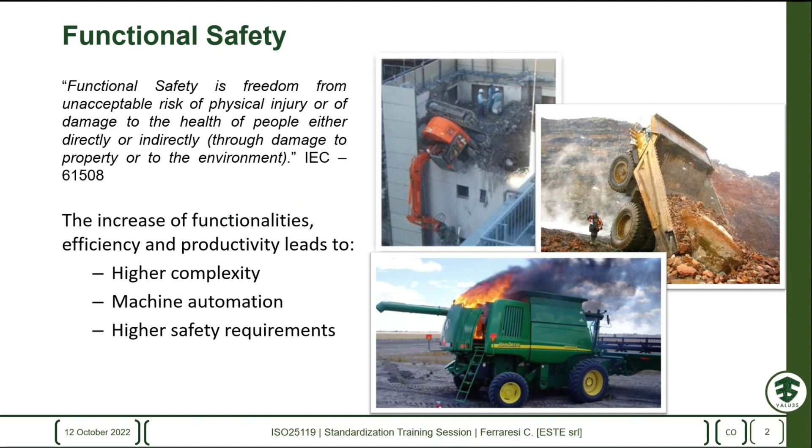But as I said before, those standards are too general for the application, or it may be too difficult to apply those standards, and therefore a set of specific standards have been developed for each industry compartment.

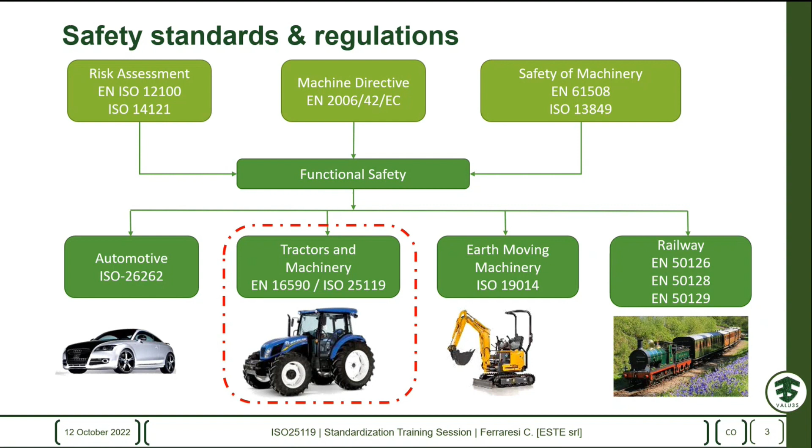The ISO 25119 is applicable only to the safety-related parts of the electrical, electronic, and programmable electronic system. So it covers all the electric and electronic parts of the machinery, and not the mechanical part. It's related to the safety of the electronics.

And it doesn't cover all the other hazards, there are specific standards for other hazards, for example, for electric shock, for fire, for ergonomics, or corrosion, electromagnetic compatibility, and so on. But that's not the context of this standard.

There are specific standards about those hazards. And the use of ISO 25119 is voluntary, so the manufacturer can use other standards.

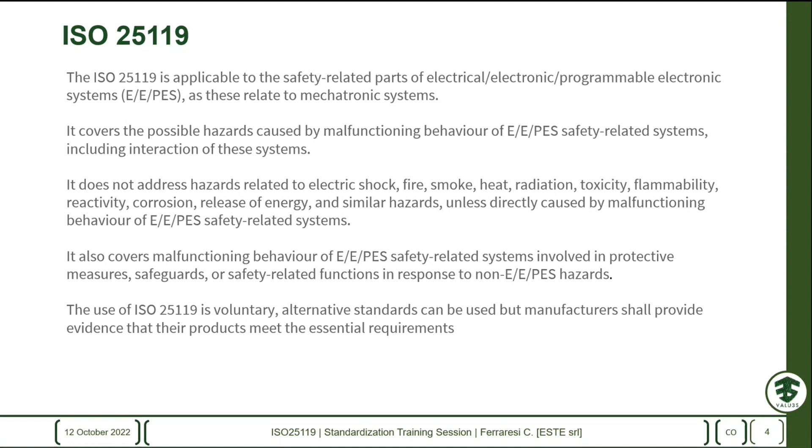I showed before the more high-level, more general standards about safety. Manufacturers can use other standards, but they have to provide evidence that the approach they have used meets the essential requirements that are also reported in this ISO.

The standard is divided into 4 parts. We have part 1 that introduces the general principles, the normative references, terms, definitions, and some other generic introduction about the

ISO 25119. There is part 2, which defines the concept phase, so all the methodologies, requirements, and work products that have to be provided during the concept phase of the development of the machine.

There is part 3, that describes the requirements about hardware, software, and system design.

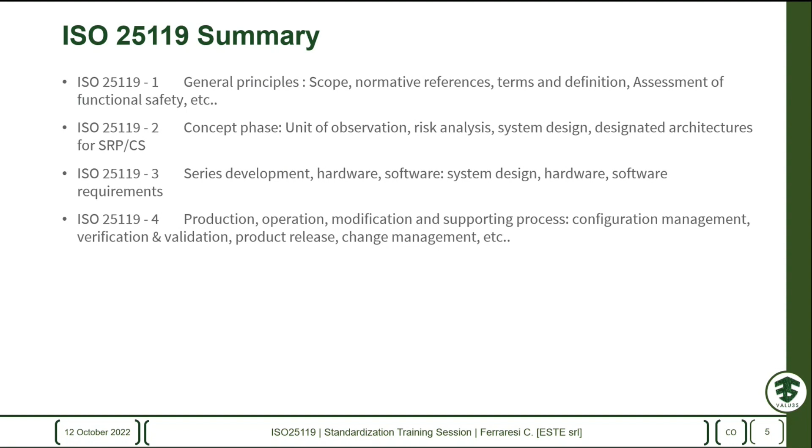And the last part, part 4, regards the production, operation, modification, and dismissing of the system. So the standard covers the whole life of the machinery, from the design, from the concept phase, to the development, and to the production and dismissing of the system.

So it defines a safety life cycle, and this safety life cycle is a derivative of the widely used V model that is common in many other standards.

So the development process must follow the V model, where for each design activity there is a parallel verification or validation activity that has to be performed in order to go on with the process.

So, as I said before, the standard defines all the requirements from the cradle to the grave life of the product system.

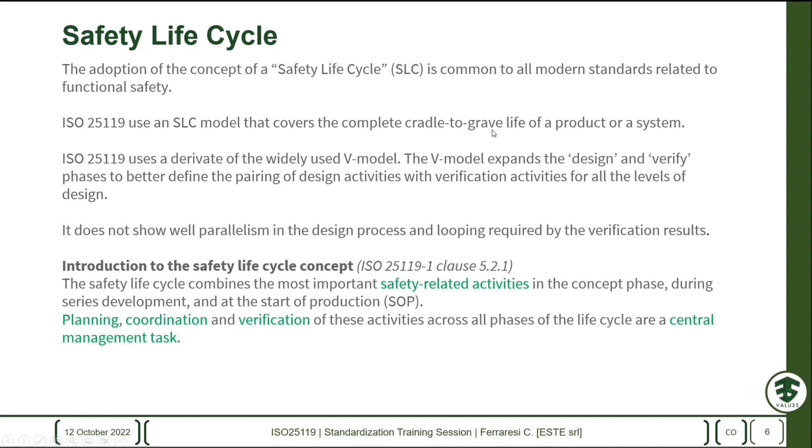Here there is a diagram that shows more or less what I said before, the different parts of the process. On the top, there is the concept phase, where we have some tasks that have to be performed.

On the center, there is the series development, so the system design, hardware, software, product release, and other things that have to be done during the development.

And on the bottom, there is the management of the production, the maintenance, servicing, repair, and the decommissioning, or the change management for modification.

We can see that on the left there is the management and assessment of functional safety that must cover all parts of the life of our system.

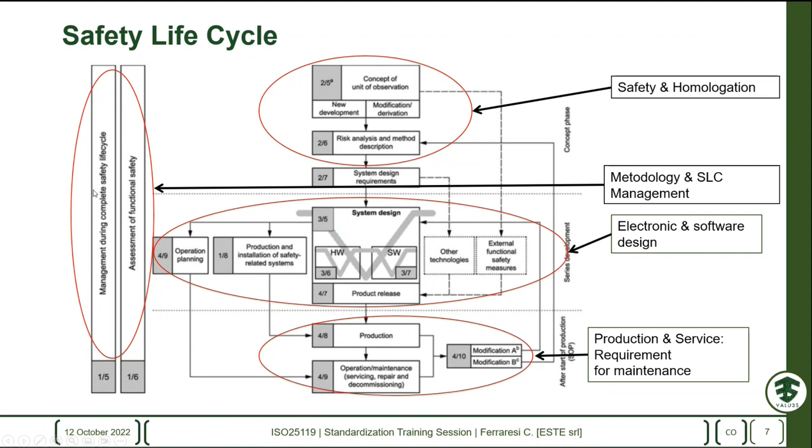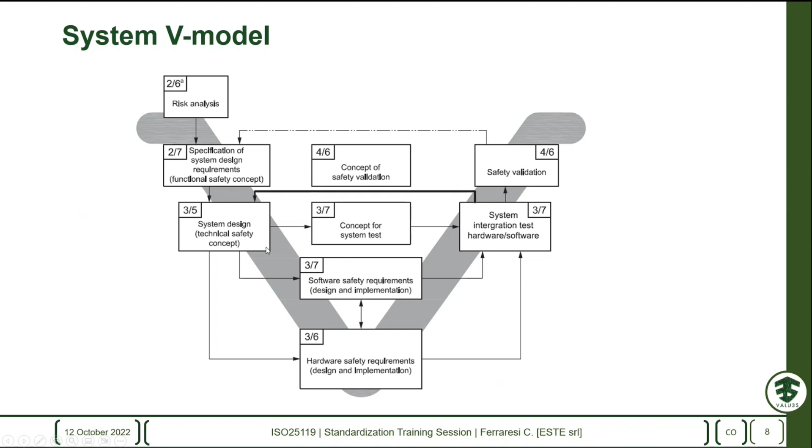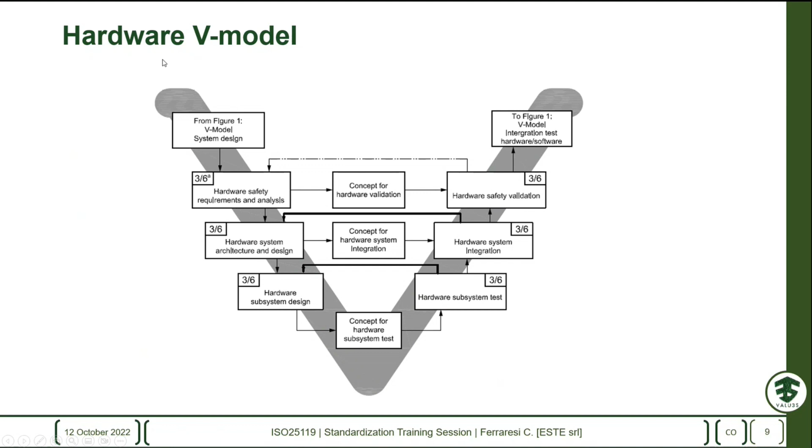As I said in the previous slide, the V model relates to system design. Here is the V model for the hardware design. The standard gives the manufacturer a detailed series of activities, work products, and verification and validation activities that have to be performed in order to validate and ensure the safety of the product. So we have the activities for the hardware and for the software - it's not only a general V model, but a V model declined for system design, software, and hardware design. So I can say it's quite detailed.

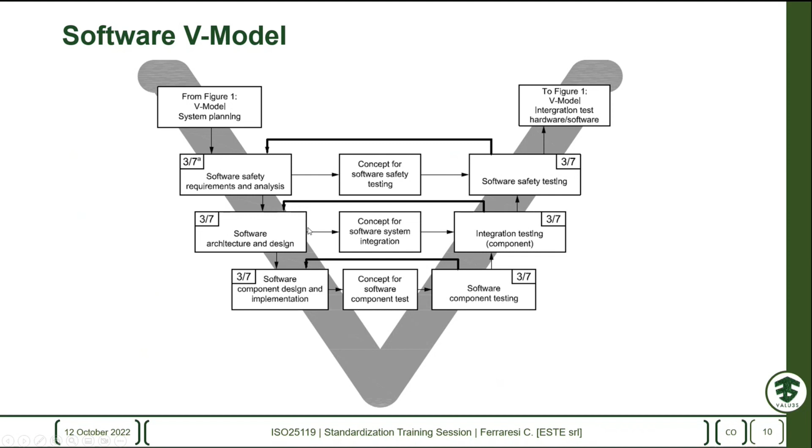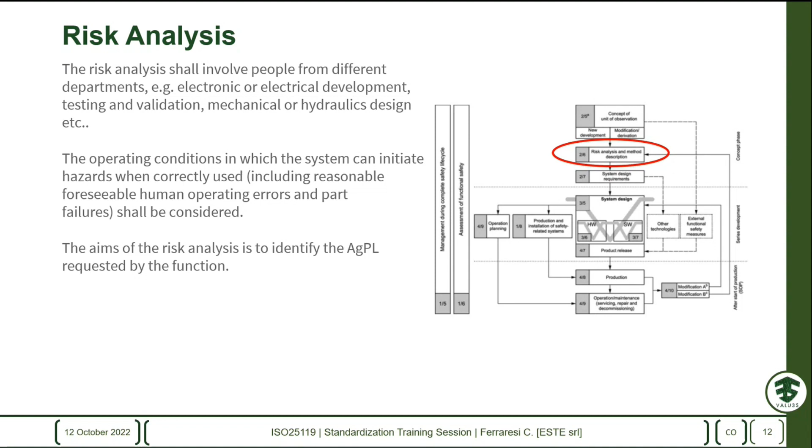One of the most important parts of the safety life cycle is the risk analysis, the risk assessment. This phase aims to identify the hazardous situations that can be generated by a malfunctioning of the safety function, and usually involves people from different departments - electronic, electrical, testing and validation, and so on - in order to analyze and identify all the hazardous situations that can be generated by our system.

So the risk analysis is based on three factors especially. The first one is the severity. When we analyze the hazard, the risk, we must consider the severity - what is the harm that can be generated by the failure of the system?

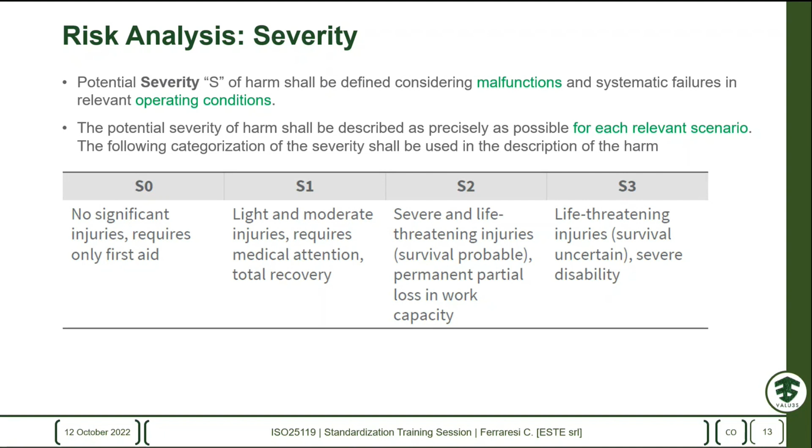The severity shall be considered for each relevant scenario - on the road, on the field, in the garage, in confined areas, and so on - any relevant scenario that the manufacturer defines. So we start from S0, the lowest severity, to S3, which is life-threatening injuries and the death of the operator, of bystanders, or others.

Another factor we must consider in our risk analysis is the exposure - the frequency, the probability of how much our system is used. The exposure is how often and how long the operator, bystander, and other people are exposed to the hazard, where a failure could result in an injury to the operator or bystander. So we must consider the severity, the exposure,

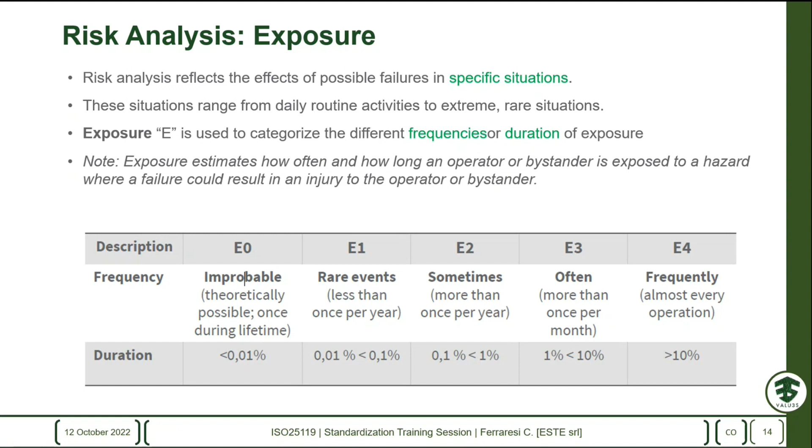and the last one is the controllability - the capability for the operator to control the dangerous situation and avoid it. So we can have a system or failure that is easily controllable, giving this hazard a rate of C0. But we can also have a hazard that is unavoidable, and so we give it the C3 value, because there is no way to avoid the hazard in case of fault.

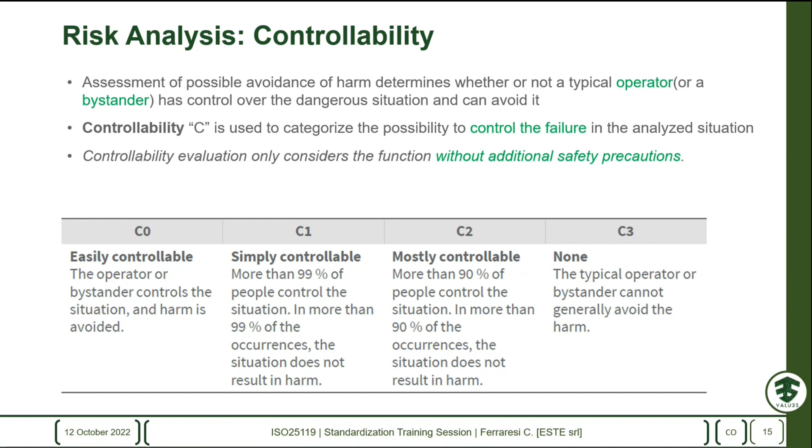Once we have all three estimations - severity, exposure, and controllability - for each scenario, we can determine the Agricultural Performance Level, the AgPL, required by the function. AgPL is one of the most important terms in the standard, and is the probability of the risk. It gives a value to our system on a scale from level A to level E, and on the basis of the AgPL, we have more demanding or less demanding system safety requirements that have to be fulfilled in order to ensure the safety of our system.

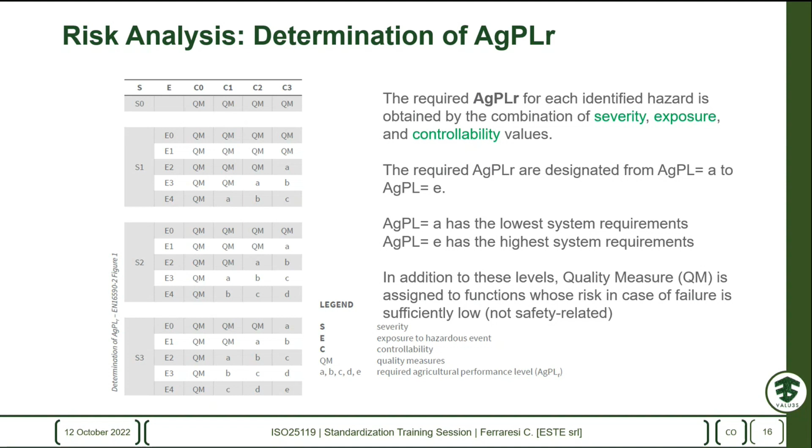So we can say that on the left there is a diagram showing, on the basis of severity, exposure, and controllability, the resulting value for the AgPL. So we performed the risk analysis and obtained the value of the Agricultural Performance Level, and this level is a probability of failure.

It's the residual probability of a dangerous failure, and we can say that it can be compared to the performance level defined on the safety integrity level, the SIL, that maybe some of you may know, like the ASIL level. There is an equivalence between the performance level defined by the 25119 and the performance level of safety integrity level defined in other standards.

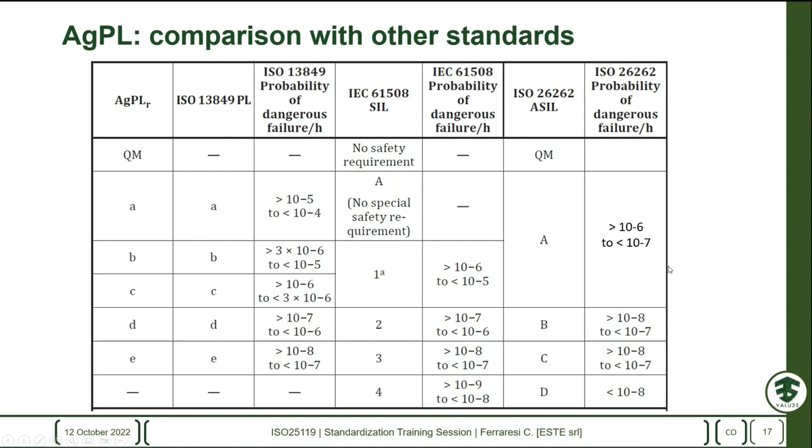The common ground is the probability of dangerous failure per hour. Different standards call the performance level in different ways, but the important thing is the probability of dangerous failures, which is the same for different standards. So there is a comparison table.

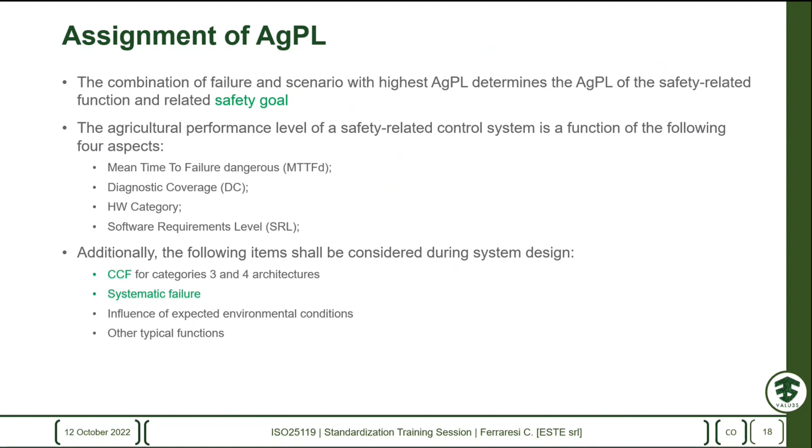Once we have the required performance level of our safety function, we have a set of requirements, a set of constraints that we have to follow when we design our system. The performance level can be split into 4 aspects: the mean time to dangerous failure, the diagnostic coverage, the hardware categories, and the software requirement level that we must consider when we design our system, because the same performance level can be obtained by different combinations of system design.

So a quick recap: on the left we have the risk assessment. We find the resulting performance level, so performance level A, B, C, or D, and then how we have to design the system once we have the performance level.

On the other diagram there is the specification, a diagram that shows that for performance level A, B, C, D, E, there are different combinations of diagnostic coverage, hardware category, MTTFd, and software requirement level that our system must fulfill.

I don't know if some of you are already familiar with the terms MTTF, diagnostic coverage or category, and so on. But in any case, I will quickly explain what MTTF, hardware category, and so on mean.

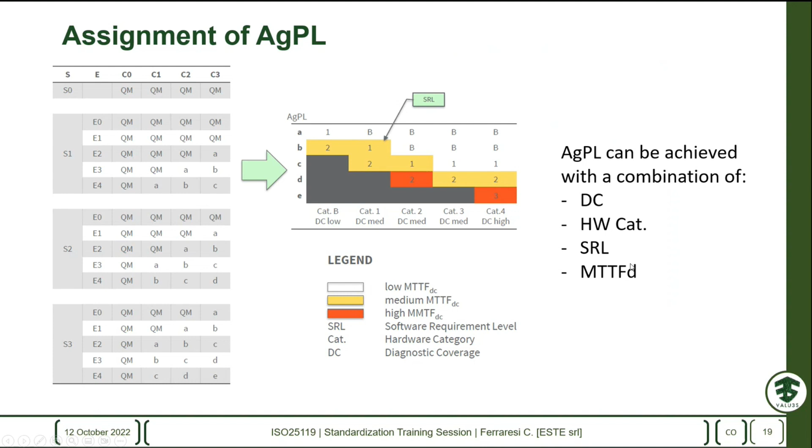The MTTFd is the average value of the expected time to a dangerous failure. It more or less defines the quality, the robustness of our hardware. The MTTFd is the dangerous percentage of the mean time to failure of our device, of our components.

It can be obtained and derived from standard databases. There are many standards that report the average or statistical evaluation of the mean time to failure of a specific component: resistor, capacitor, integrated circuit, microcontroller, and so on.

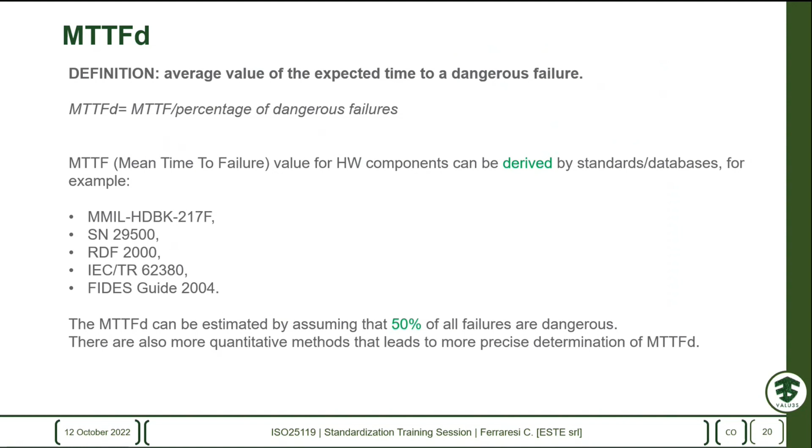It's not easy to estimate or calculate the actual MTTF of our component, of our system, because it's composed of many different components. Usually, the manufacturer estimates the MTTFd assuming that 50% of all failures are dangerous, but there are more quantitative methods that can lead to a precise determination of the mean time to dangerous failure. It is up to the manufacturer to refine or not the calculation of the MTTF.

Another important thing is that diagnostic coverage is the fraction of the probability to detect dangerous failure over the probability of total dangerous failure. The aim of diagnostic coverage is to determine how many dangerous failures we are able to detect out of the total of dangerous failures of our system.

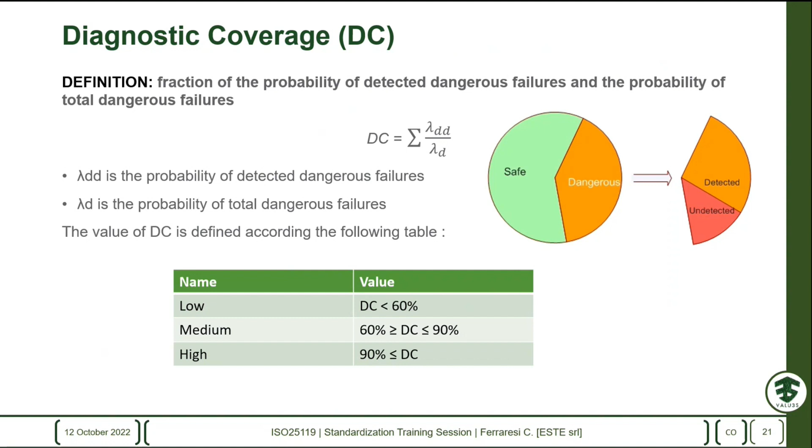The standard gives three values of diagnostic coverage: low diagnostic coverage, when we are able to detect less than 60% of all the dangerous failure; medium; or high, if our system covers more than 90% of all the dangerous failure.

But probably the more interesting concept exposed in the ISO 25119 is the hardware category concept. The MTTFd and the diagnostic coverage are concepts that are quite common, at least in my experience, reported also in other standards. But peculiar to this regulation is the hardware categories.

The hardware category is a suggested architecture that we have to use. It's not just suggested—we have to use it, or give evidence that we follow the prescription defined by the required hardware category in our design. It is a suggested architecture that has to be used in the implementation of our safety function.

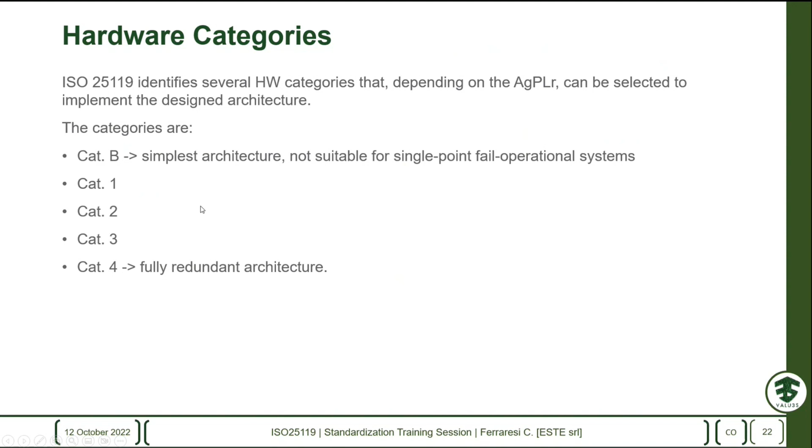What does it mean? We have 5 categories, from category B to category 4. We can see that category B is the simplest architecture, while category 4 is a fully redundant architecture. For example, the standard defines hardware category B as having low diagnostic coverage, so less than 60% of dangerous failures are detected.

The MTTF for the channel, for the combination of input logic and output, can go from low to medium. This is the simplest architecture that we can imagine for our system. It is composed of an input, a logic, and an output. Usually this architecture, category B, is only used for low demanding safety functions.

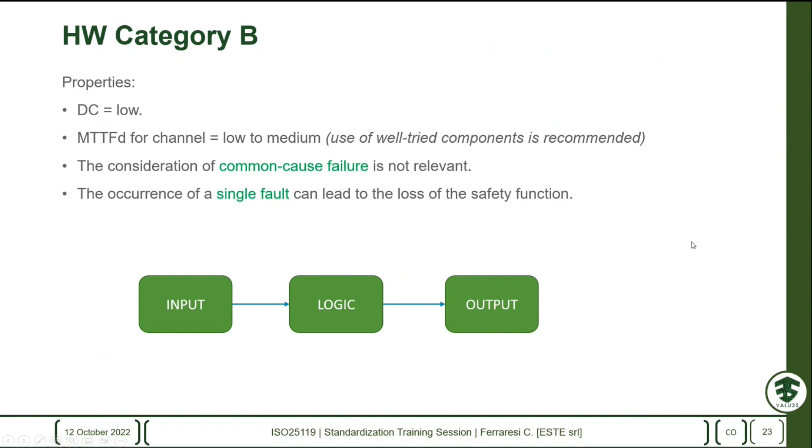For simple systems, we have a refinement of category B, which is category 1. It's more or less the same as the previous category, but a single fault on the safety path input, on the input, the logic, or the output, can lead to the loss of the safety function, but we have an improved diagnostic coverage.

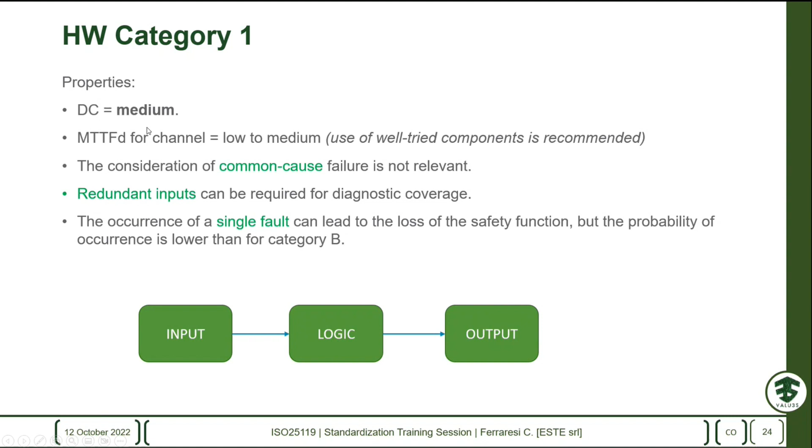Hardware category 2 is more interesting. In addition to the standard chain of input, logic, and output, we have test equipment that shall detect any fault on the logic or on the input, implementing continuous monitoring of the logic and the output. So we are able to reach a safe state, to shut down safely our function in case of a fault, because we are able to detect it. We have an improved detectability of failure.

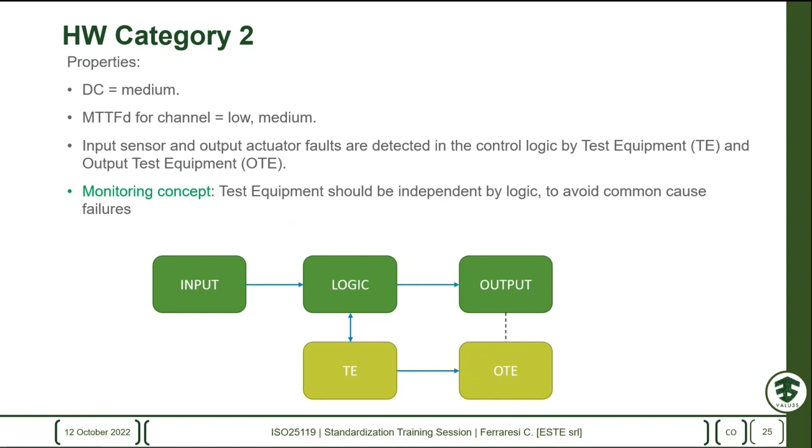In addition to category 2, there is category 3, where we have redundancy: two chains, input 1, logic 1, output 1, and a redundant safety path. This architecture is suitable for a single-point fail-operational system. So in case of a single fault, the redundant part can provide the functionality, maybe with reduced performance, but we do not completely lose the safety function, so our system is fail-operational.

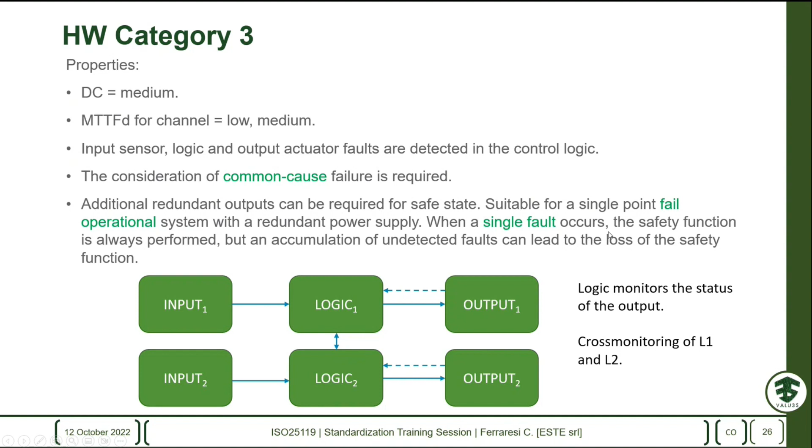The last one, hardware category 4, defined for the highest performance level, imposes redundant input, logic, and output. It's similar to category 3, but has the highest diagnostic coverage, which must be high. So it can be considered fault tolerant, leading to greater dependability of our safety function.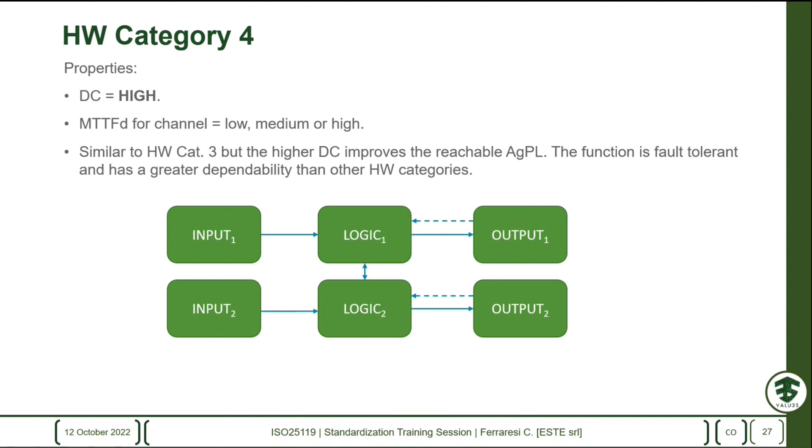So we have seen the hardware categories, which are suggested architectures for the design of the hardware and system design of our system. In addition to this, the standard also gives requirements on the software: requirements for the software architecture, for the software module design, and for the software testing.

As I said before, for the software requirement level, called SRL, the scale goes from safety requirement level B to safety requirement level 3, where more demanding methodologies, testing, and techniques have to be applied to comply with the specified software requirement level. You can see there are techniques like informal design methods, semi-formal design methods, or formal design methods.

For instance, for the safety requirement level equal to or greater than 2, informal design methods are no longer allowed, and we have to switch to semi-formal or formal design methods, which give more guarantee about the quality of our requirements.

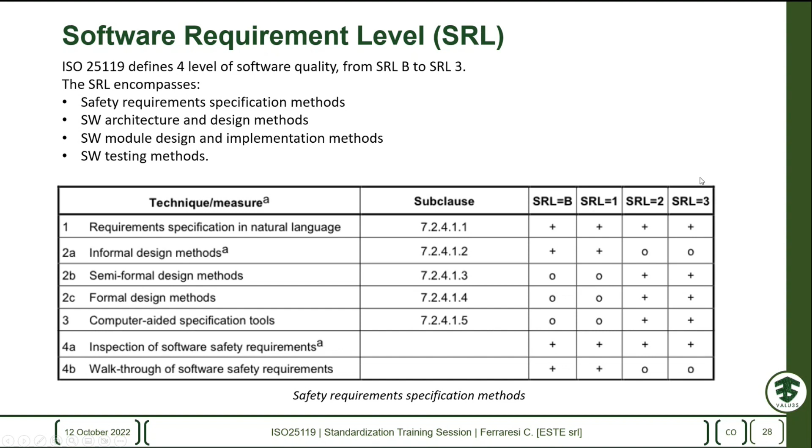The same applies to the design and implementation of our software. When we are on SRL 2 or 3, we have to use strongly typed programming languages, follow formal design methods in the design of our software module, and also use defensive programming techniques if our performance level requires SRL 3.

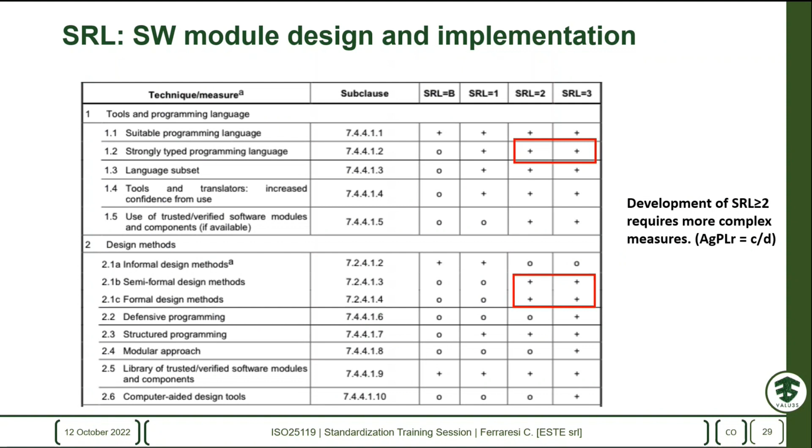We can see that the software becomes more complex if we have to fulfill a greater SRL, also for the design and for the test. This slide is also about software design and implementation. The prescriptions required for software requirement level 3 are, in my opinion, quite demanding: we have to limit the use of dynamic variables or objects, limit the use of interrupts, avoid recursion, and have defined use of pointers, so our software becomes much more complex to design.

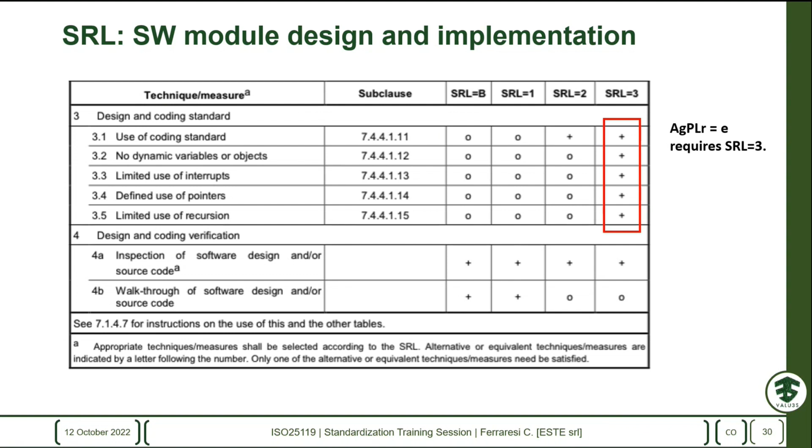Also for the testing, we can see that there are several tests that have to be performed, and we have to give evidence that we have carried out all the testing activities required by our software requirement level. So from static analysis to performance testing, and from functional to black box testing, depending on the software requirement level, we have to perform several activities.

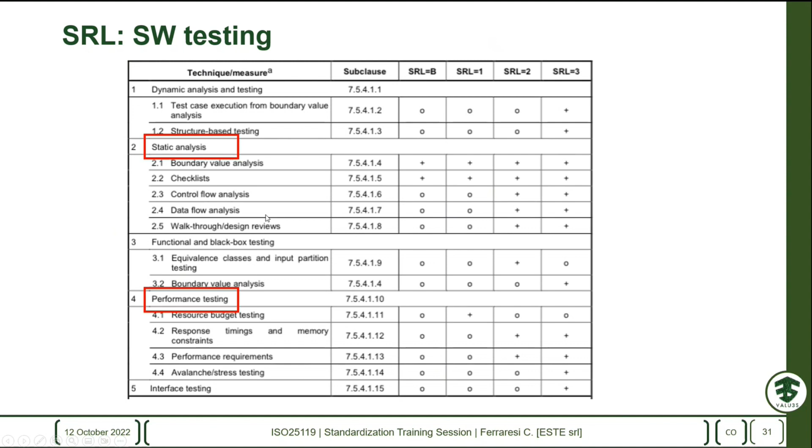In addition to this, we have to give evidence that the safety related part of a software is independent from other software that is not safety relevant. So we have to give evidence of the software partitioning: a fault or error in the non-safety related part of our software must not influence the safety related part. So no memory corruption, blocking of different partitions, allocation of processor execution time, and so on. We have to give evidence that our safety software is independent from the other software on the same system.

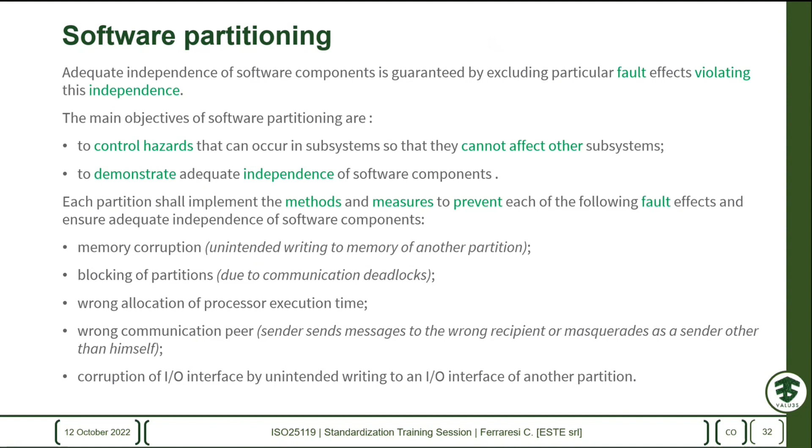Another important point defined in the standard is the estimation of common cause failure. If we have a redundant architecture, we must be sure there is no common cause point of failure that can affect both parts of our architecture. The ISO gives us a checklist that we have to review, which defines a score for the measures we use to protect our system from common cause failure.

For example, the physical separation between signal and power paths. We have to be sure we have different, for instance, power supplies in a redundant architecture. Otherwise, a single fault on the power supply can shut off the whole system, and it is not good.

We have to use diversity in the design of our architecture, and perform several measures to ensure the robustness of our system. So if the score is greater than 65%, and we are using a redundant architecture, we are okay. We can say that our design is common cause failure proof.

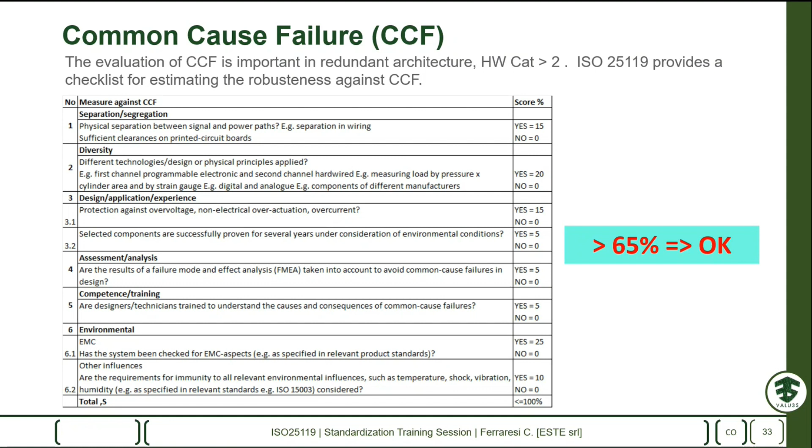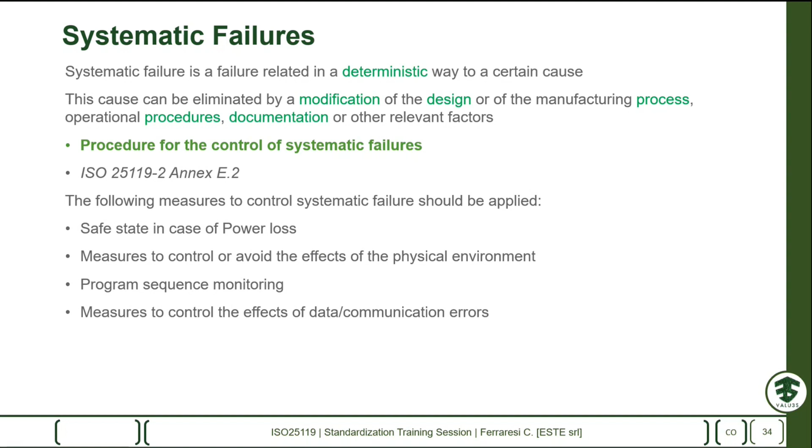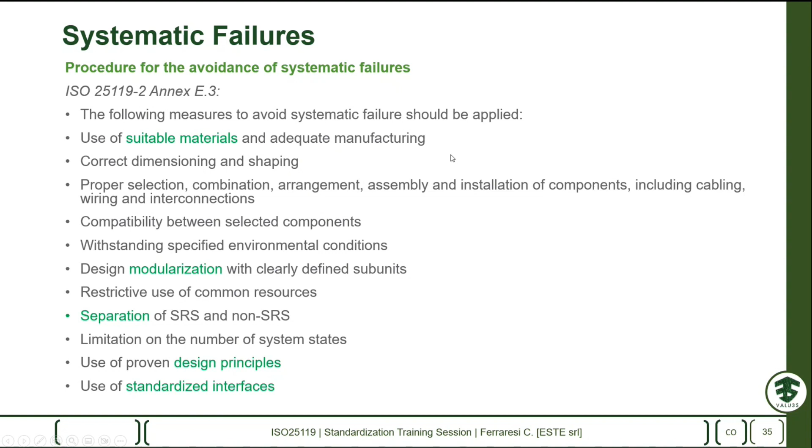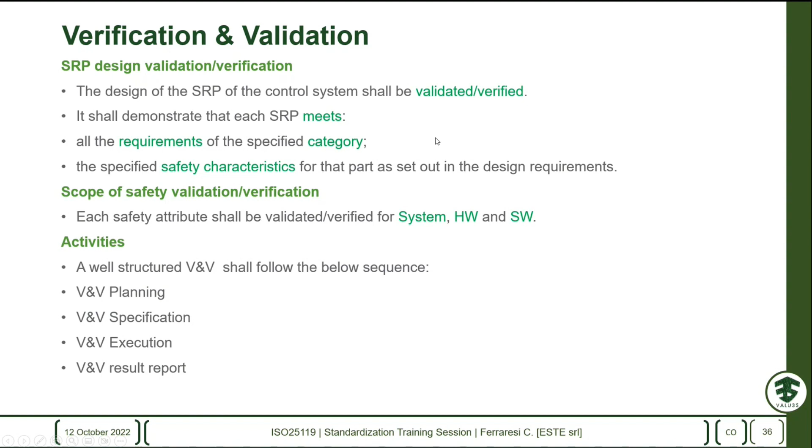The last part: in addition to all the prescriptions about design and production, the standard also gives prescriptions about verification and validation. There is a list of validation and verification activities that must be performed, reported in the standard. There are specific activities that involve the test specification, the hardware, the software, and verification activities on the design, for instance the use of V&V methods, testing, black box, hardware in the loop, machine testing, analysis, and other documents that the manufacturer must produce in order to ensure that all safety requirements have been fulfilled.

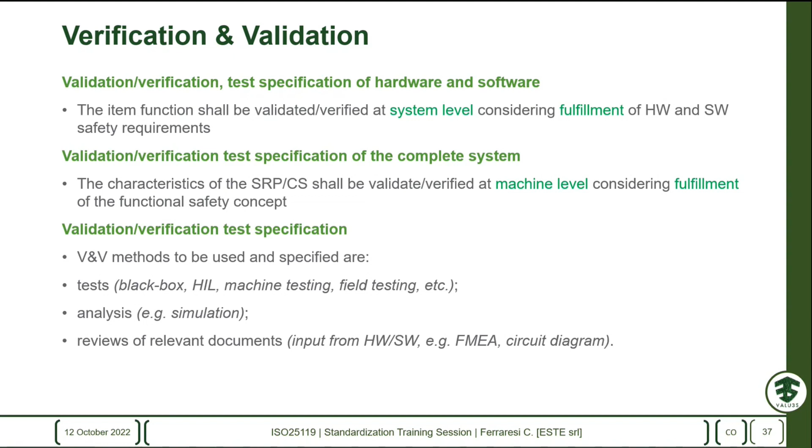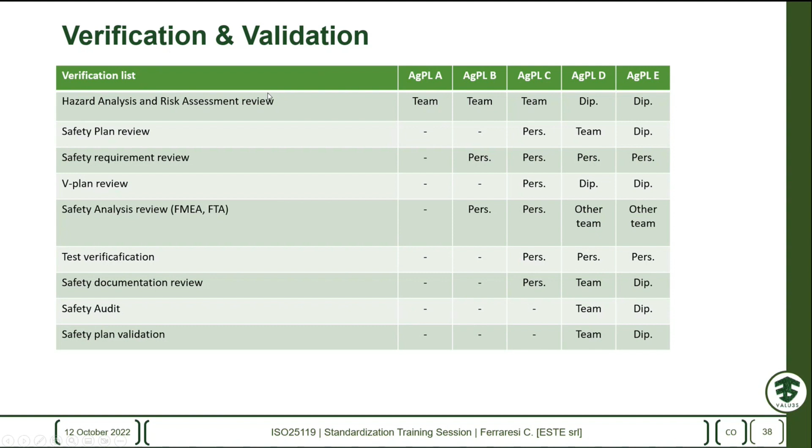So with this slide, I conclude my presentation. I hope it was useful, it's only a quick overview because we have a short time. This was a quick overview of ISO 25119.